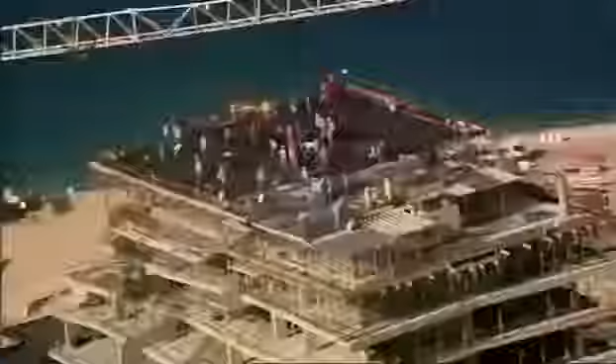Abu Dhabi, the richest city on the planet. It wants to join the City Super League and is undertaking an incredible transformation, building this extraordinary skyscraper, Aldar HQ. Nothing like it has ever been attempted. It'll be a race against the clock. Will this megastructure push even Abu Dhabi to the limit?

Abu Dhabi is in the midst of a construction boom. It's the largest of 7 sheikdoms known as the United Arab Emirates. Its capital, also called Abu Dhabi, is the richest city on earth. Its ruler, Sheikh Khalifa, has a cool $875 billion in the bank and an audacious spending strategy to match. He wants to transform the skyline and compete with the international elite of London, New York, and Hong Kong.

But this is not the first time the Emirate has stood at the crossroads. Just decades ago, Abu Dhabi was a desert backwater, until the discovery of oil in 1958 brought unimaginable riches to its ruler, Sheikh Zayed. As the petrodollars flowed in, he converted the shell houses into high-rise, and the traditional way of life was swept away.

Today, Abu Dhabi is a thriving metropolis, sitting atop the world's 5th largest oil reserve. But black gold alone cannot put this city in the Super League. To do that, Sheikh Khalifa must lure big business and tourist dollars. Abu Dhabi must expand to thrive.

To put Abu Dhabi on the world map, fledgling property developers Aldar plan a whole new micro-city, Al Raha Beach. It's an ambitious proposal. At 11 kilometers long and almost a kilometer wide, this city on the sea will be the biggest project ever attempted in Abu Dhabi's history. Mohammed Al Mubarak is in charge of delivering this audacious development. The vision of their highnesses and the vision of Aldar was to create this almost mini city where people can live, study, play, and work in one destination.

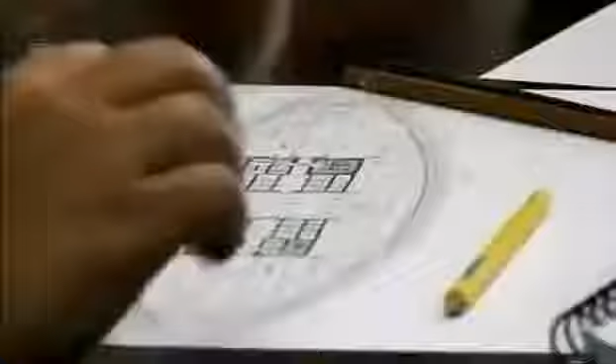Al Mubarak must attract investors if Al Raha Beach is to succeed. So to launch the project, he commissions a signature skyscraper. Creating an iconic structure on Al Raha Beach was of vast importance in basically putting Al Raha Beach on the world map. Al Mubarak sets Lebanese architect Marwan Zgheib the task of designing an icon that raises the stakes even higher. The building will become Aldar's headquarters in the heart of their colossal development.

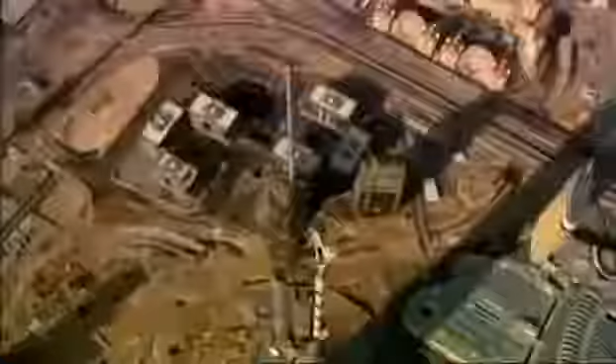But creating something new in a land where the iconic is the everyday won't be easy. Neighboring Emirate Dubai has taken center stage with a number of headline-hitting projects: the world's tallest skyscraper, Burj Khalifa, the Palm, and the World, and the emblematic Burj Al Arab. To stand out from the crowd, Zgheib knows he must redefine the extraordinary. Simple can be powerful sometimes, especially in architecture. You can see it since the pyramids of Egypt. Most of the iconic buildings are very simple buildings.

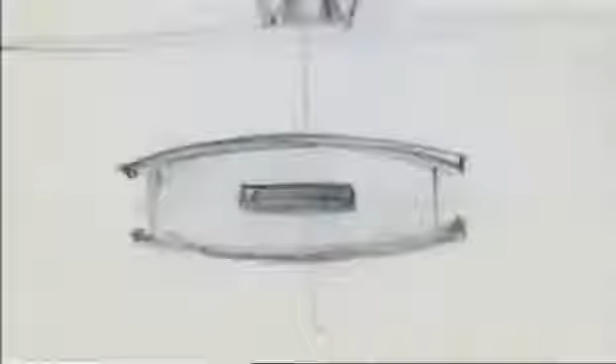But it isn't until Zgheib is relaxing on a plane that he has a brainwave. I couldn't sleep, so it was a moment of relaxation, you know. And then the idea came simply. So I took a pen and I drew it on a sketchbook. The design is simple but daring. A round skyscraper taller than the Statue of Liberty, with a curved glass skin covering the area of 4 football fields. To be honest with you, the moment I imagined it, I knew it was a winning concept. I knew it was something different.

In fact, the design is so unusual, Al Mubarak initially doesn't know how to react. When I first looked at the MZ design, I was a bit confused in the beginning, to be honest with you. I felt like I was looking at a comic. I felt that this was a flying saucer and basically it landed on Al Raha Beach. And I just kept on staring at it for like another 15 minutes. And after 15 minutes, I just fell in love with it.

Zgheib's design is inspired by nature. 2 giant circular curved walls of glass mirror an open clamshell. Architecture is nothing but imitation of nature. At the beginning, the idea was so geometrical, very pure. It's like a seashell. The seashell has deep meaning for Abu Dhabi with its seafaring heritage. But a circular design poses a problem. Just like a coin that stands on its edge, it risks being unstable. The circle must be balanced.

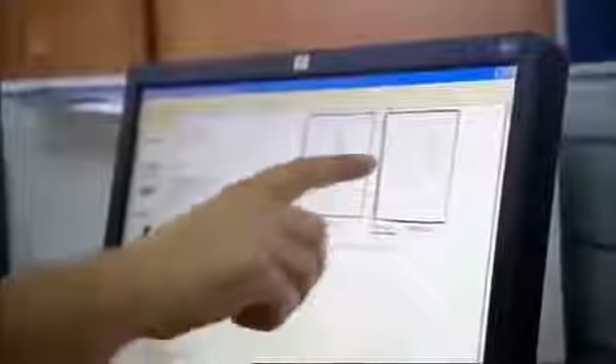So Zgheib turns to some very old-school geometry. The real challenge of the circular facade was to find the 2 points where the building should pose on the ground. And for that, I had to go back to one of the oldest rules in architecture, proportion. When you have a circle, you can divide it into a pentagram.

And that pentagram, in fact, is a representation of the cosmic body of the human being. So you can put a man in that pentagram, the man and the universe. So the pentagram will define the 2 points of the circle where the facade will lay on the ground. And this will create the perfect balance.

It was the same thinking that led 16th century philosopher Heinrich Agrippa to draw man as a pentagram inside a circle, and has helped architects to proportion buildings for centuries. But it's not the skyscraper itself that poses the first major challenge. It's the proposed site. They wanted to show me the site, but all you can see was the sea, nothing but the water.

Unbelievably, the solid ground required for Aldar HQ does not yet exist. The desired location is 700 meters out in the Persian Gulf and 8 meters underwater. New land must be created. Over 3 million cubic meters of sand must be found. Surely a simple task with Abu Dhabi's endless desert dunes.

Whilst cutting a shipping channel in the late 1970s, Sheikh Zayed created an island of discarded sand. Luckily for the engineers, it's just across the water, so they decide to move all 20 million cubic meters of it. A fleet of cutter dredgers eat their way into the island. These are no ordinary dredgers. It takes an enormous claw layered with 48 reinforced steel teeth to slice through the hardened sand.

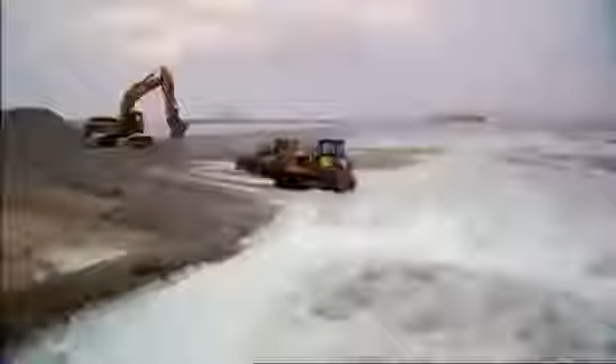The sand is pumped through a floating pipe to the construction site. Here, excavators toil 24 hours a day to flatten the virgin ground. After 8 months, the land for Aldar HQ is fully formed, and with this, the first major problem overcome. Now, engineers must somehow turn Marwan Zakhem's radical design into an engineering blueprint.

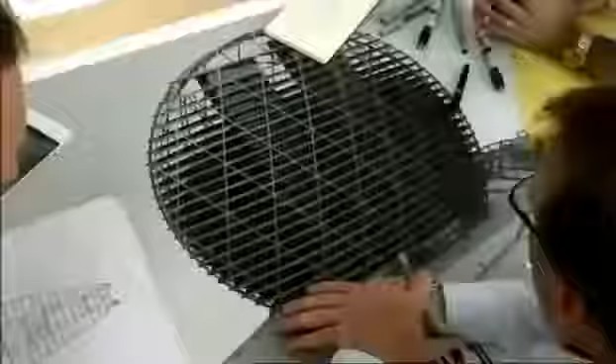Aldar want their skyscraper completed by an astonishing deadline. In just 30 months' time, the eyes of the world will be on Abu Dhabi when it hosts its first Formula One Grand Prix. The racetrack will be on its own designated island, complete with hotels and theme parks. And Aldar are building the lot. The international press and tens of thousands of visitors will descend on the city. It's the ideal opportunity for Aldar to showcase their new HQ. But to stand any chance of meeting this target, the team will have to pull out all the stops.

Just 1 month after design has started on Abu Dhabi's round skyscraper, the construction team arrive on site to begin foundation works. For construction manager Miles O'Sullivan, the schedule is a shock. With the design not complete and being told you're going to pile in 1 month, almost crazy. But it's not just the first deadline O'Sullivan has to worry about.

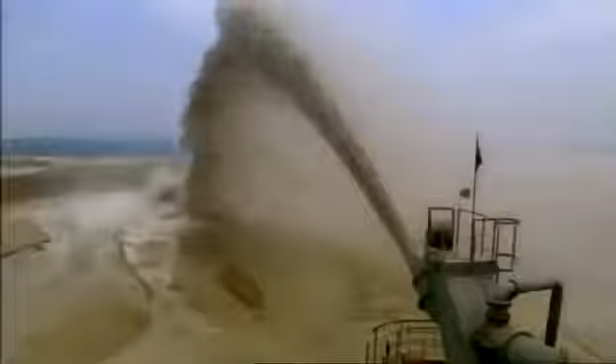Aldar HQ's round curved shape presents an enormous sail-like area when wind strikes. Wind tunnel tests must be done to prove the foundations can take the strain. But the results won't be back until work has already started. Abu Dhabi is regularly hit by high-pressure winds that sweep in from the Persian Gulf. But building Aldar HQ so close to the sea will put the foundations under another kind of pressure.

Digging for Aldar HQ is very similar to digging here in the sand. What you get as you dig down is you'll get to see the groundwater starting to surge through the sand. And in fact, it's that groundwater that we see start coming through the sand here that's creating the pressure and obviously creating the issues for us when we do the construction. The upward pressure of the water and the loose sand pose a problem for foundation construction.

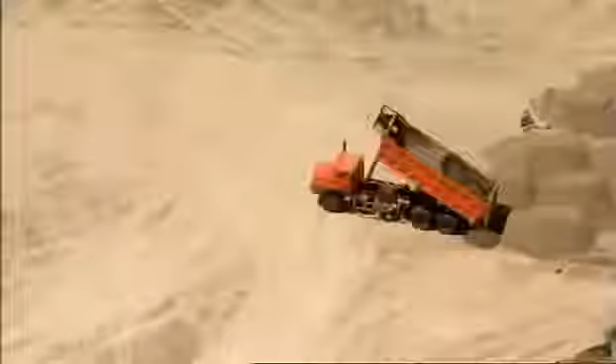Before excavation can begin, the team must build a solid barrier called a diaphragm wall or D-wall. It's a concrete barricade formed of interlocking panels which socket into the bedrock and reach 16 meters below the surface. The D-wall holds back the loose sand and the surging seawater, ensuring the ground inside the barrier can be removed. These areas here, what are these? Sumps? The D-wall must be built before the foundations can be laid.

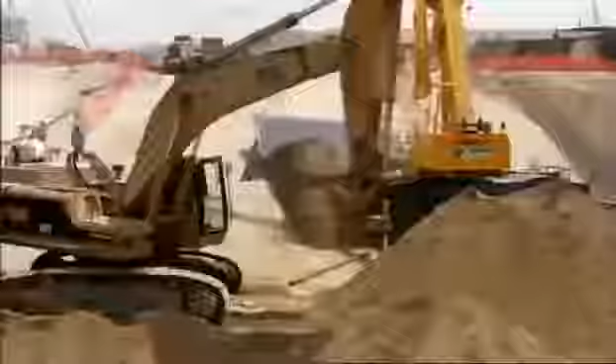But with the blueprint a work in progress, the team can only hope that over-engineering the foundations will make them strong enough. The design calls for about 400 concrete piles that work in 2 ways. Half of the piles rely on friction with the ground to secure the structure to the rock and sand below, whilst the remaining piles drive deeper into the rock to dissipate the building's immense loads into the ground. On site, D-wall construction begins. It's the same process ongoing at this Abu Dhabi construction site.

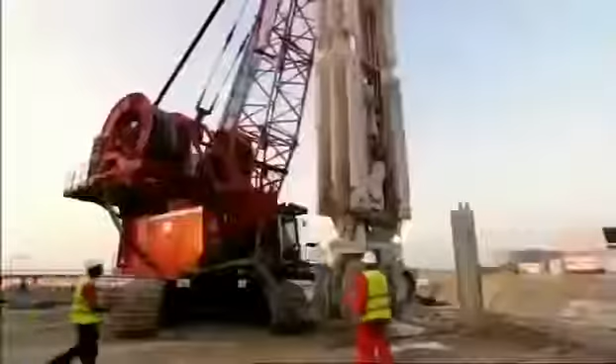Until recently, Al Raha Beach was just a vision for Aldar's Mohammed Al Mubarak, but the dream is slowly emerging from the sea. Seeing that land come up, seeing the amount of work and the amount of staff we had on the ground to make sure that was going to be done, that was like watching Rome being built.

The D-wall and concrete piles create a firm foundation upon which to build Aldar HQ. But the force of the sea pushing up through the sand still poses a threat to the skyscraper.

A great way of demonstrating the problems we faced at Aldar HQ with the groundwater is in imagining that this bottle here is Aldar HQ. And as I push the bottle down, you'll see forces are exerted on my hand. And in fact, that's the groundwater trying to push the building out, trying to push Aldar HQ out of the building site.

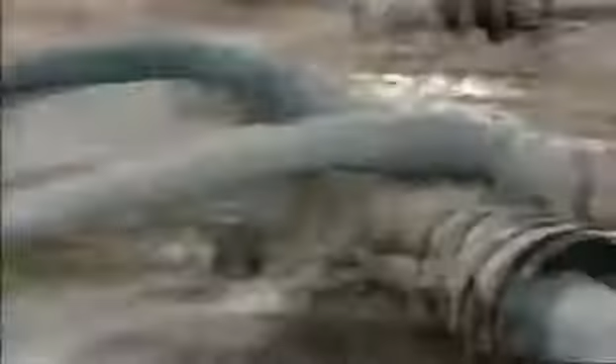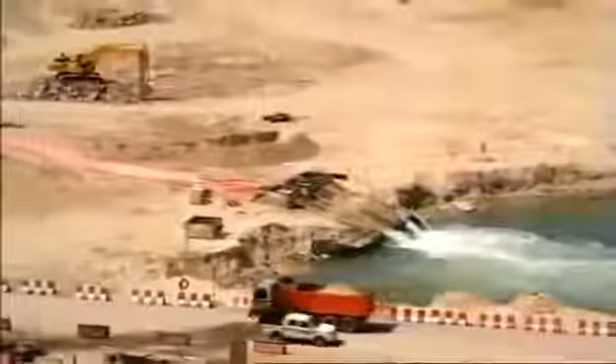To keep the site dry during construction, water is sucked out of the sand and pumped out to sea. But that's only a short-term solution. To protect this skyscraper in the long term, the team need an extra defense. It's a giant slab of concrete called a raft.

It creates a barrier against surging water, stops the piles from punching up through the building, and acts like a snowshoe to evenly distribute Aldar HQ's 59,000-ton weight into the ground. Raft construction for Aldar HQ is 12,000 cubic metres of concrete, which is a 30,000-ton structure. It's a huge element.

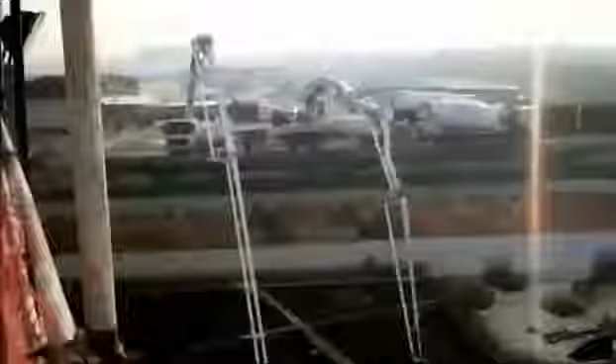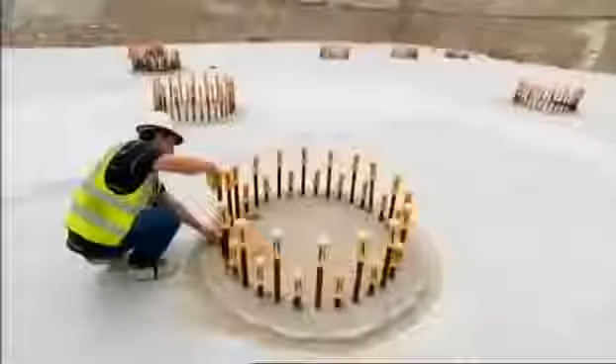With 2,000 truckloads of concrete to pour, it's a job that continues into the night. But engineers are just getting to grips with the severe forces that will affect the piles. The unique shape of the skyscraper will capture wind like the sail of a yacht. There are no guarantees the foundations will be strong enough to cope with the loads.

The advanced construction works had to commence so quickly that we didn't have time to do the wind tunnel test. It was important that we did one, primarily because this is a unique shaped building. Gibbons calls upon wind engineer Roy Denoon in Colorado, USA. He puts a scale model of the HQ through its paces in his high-tech wind tunnel.

Right at the start, Craig Gibbons actually called me and said, "We've got something really unusual coming up. Can you take a look at it and give us your first best guess of what the wind loads might be? Give us some guidance on how to get to some loads for the foundations, because this is running on such a fast-track schedule." Knowing that Gibbons is already building the foundations, Denoon wastes no time in firing up the fans.

If the tests reveal the wind loads are higher than predicted, the foundations already in the ground may have to be redesigned. To be putting in the foundations before we could finish the wind tunnel testing, that always gives us a little bit of cause for concern. Denoon is right to be worried. He knows how high-altitude wind impacts on very tall rectangular skyscrapers. But Aldar HQ's lower height means another type of wind is the threat.

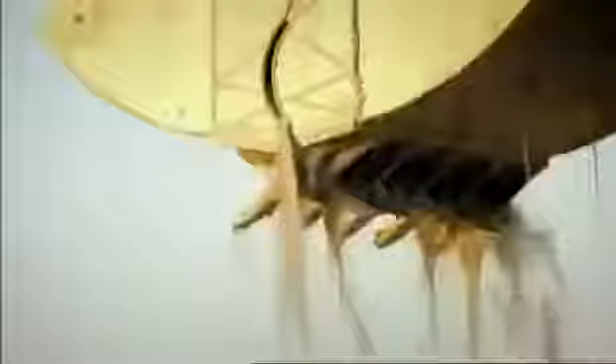It was a great relief to know that Roy was just winding me up, and that in actual fact the wind loads were very much in line with what our expectations were. The results of the wind tunnel test are great news, but the relief is short-lived. Now the structure needs a super strong backbone or core. But again, conventional building won't fly with this design. For Aldar HQ, one core wasn't enough. We needed 2 cores, in fact, to take all the loads down into the structure.

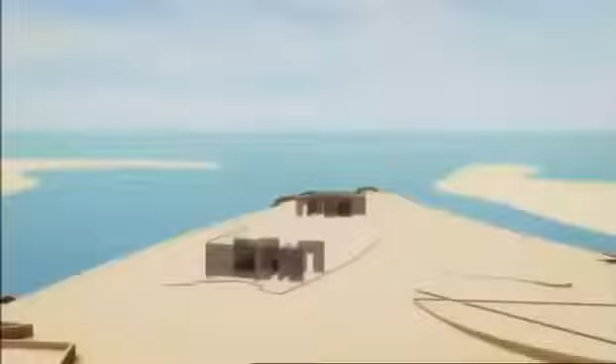Aldar HQ needs 2 concrete cores for extra stability. The twin spines rise a full 125 meters from the concrete slab to level 23. Reinforced with 6,500 tons of steel, these cores will transfer the loads into the piles. But to channel these forces safely, the concrete must be cast without any flaws. They need a way to build the cores as 2 single pieces of concrete. The answer? To slip form.

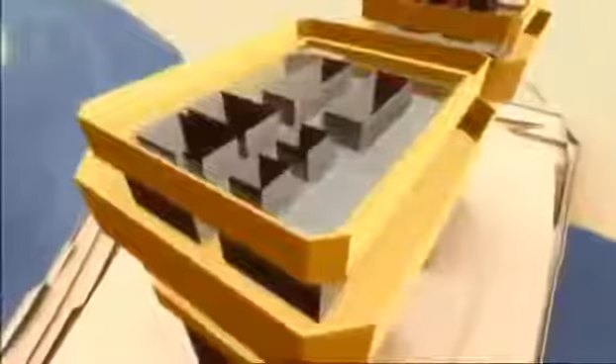It's a clever way to build big concrete towers. Liquid concrete is poured into a giant mold, which forms the shape of the structure. The mold slowly climbs up the core as it's cast, forming a single concrete tower without any joins. Seamless concrete will ensure the HQ's cores are strong. But these 125-meter backbones must be built in only 6 months. It's the same process ongoing at this Abu Dhabi construction site, led by the Aldar HQ team.

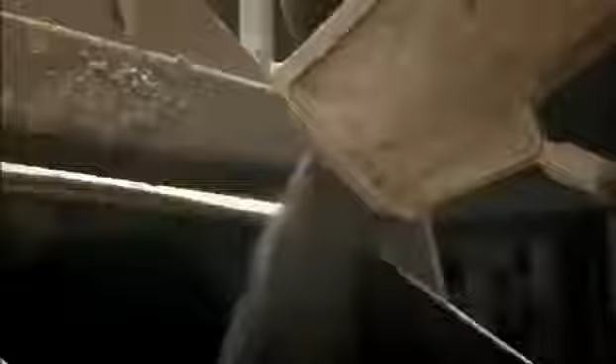We are calculating how much per hour we need to climb, and then how much concrete we need to place in every hour. Slip form is fast, but on this schedule it's not fast enough. O'Sullivan has a trick up his sleeve to speed up construction. We set a challenge to both cores, who could get up there first. More, get up. The teams battle to reach each level before the other.

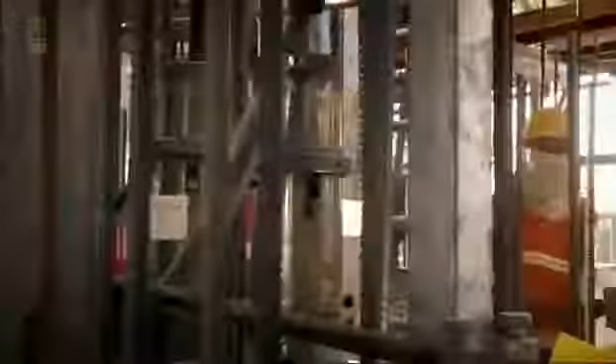The cores grow meter by meter under a constant cycle. The concrete is released and poured around the steel reinforcement. Hydraulics anchored to the structure raise the mold or shutter so that the next layer of concrete can be poured. Manpower is a key focus because slip forms are very labour intensive. You need to make sure that the guys are on deck, they're there at the right time, they're doing the right works.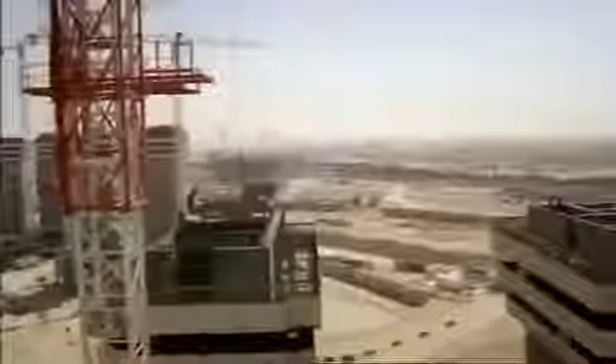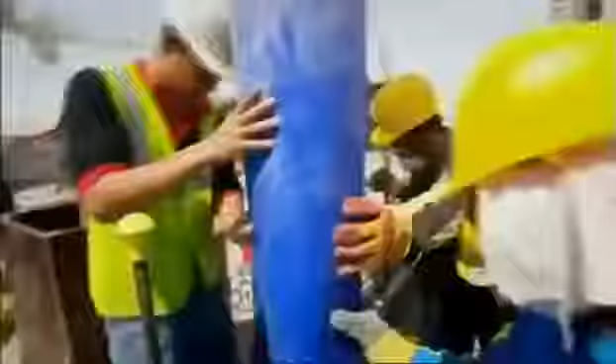4 months into core construction, the 2 teams are neck and neck in the race to the top. Core 1's team leader keeps a close eye on Core 2's height. It's been my benchmark, so if I'm doing better, I'll be ahead of them. There are a lot of pressures. My boss is telling me, do this, go up, go up, go up. But it's good, the pressure is good. Core 2's leader also feels the strain. I'm working 24 hours today. I try to finish earlier than the other core.

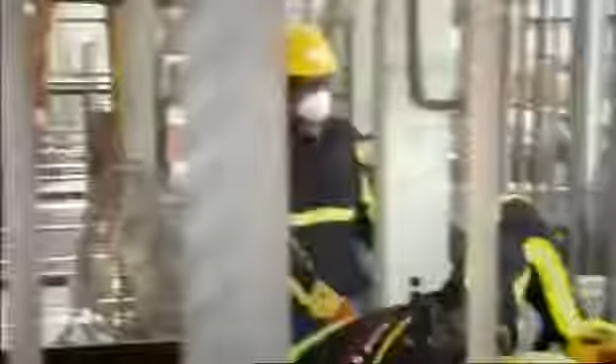Every month, the builders pour enough concrete to fill 1.5 Olympic swimming pools. But the teams aren't home and dry yet. There's still a challenge to finishing. Cores are renowned for going up quickly and sometimes having problems, so there's a lot of coordination effort that goes in to make sure that they do go up on time. We had structural steel elements to cast in. We had crane connections to get right.

After just 6 months, the 2 cores are approaching the top. Core 2 is only a meter or so behind, but Core 1 push ahead to victory. Core 1 won the race. It's really good to know that we're on top. For O'Sullivan, the contest to build the cores in record time has paid off. A lot of planning goes into the cores. To see it come off, a fantastic feeling. But it's only a stepping stone, the core construction. There's a lot more to go on.

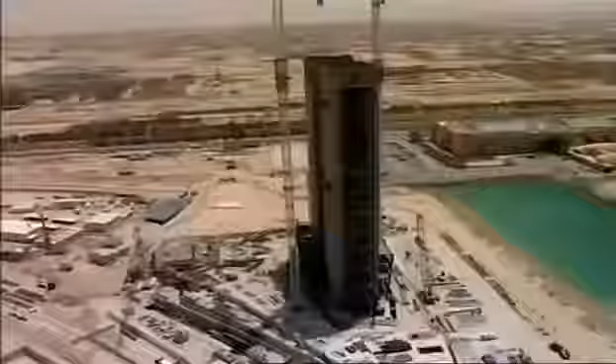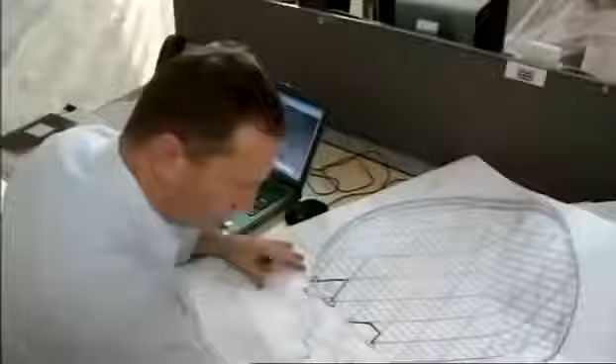The team have so far overcome the obstacles to bring Aldar HQ to life. But now they must face their most complex challenge to date. 1 year in, and Abu Dhabi's radical skyscraper is beginning to take shape. But with only 19 months to the deadline, the engineers must crack how to build Aldar HQ's vast external shell.

The design demands a heavyweight shell to support its wide girth and survive huge wind loads. But the architect stipulates open office space, floor-to-ceiling windows, and panoramic views of the Persian Gulf. In the United Arab Emirates, the shells of rectangular skyscrapers are built with concrete.

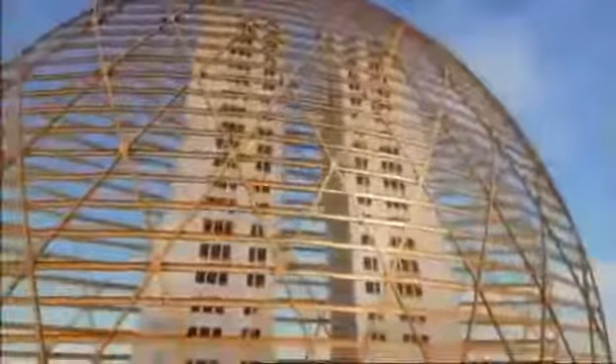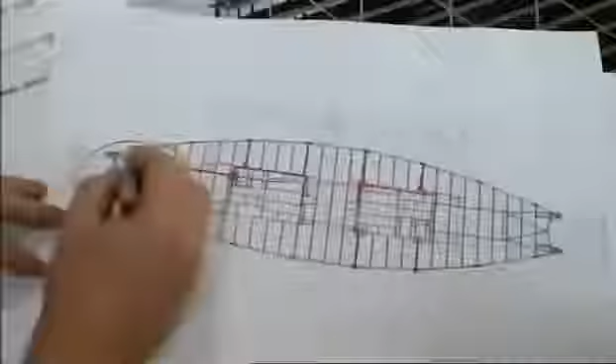The steel exoskeleton should make the architect's vision possible, but it'll be a first for the United Arab Emirates. Constructing a skyscraper like this will be a step into the unknown. The geometry of the building presented a significant challenge to us, but the other challenge was that a diagrid building, or buildings using this diagrid system, had never been built before in Abu Dhabi and the UAE. Let's have a look at it if you don't mind.

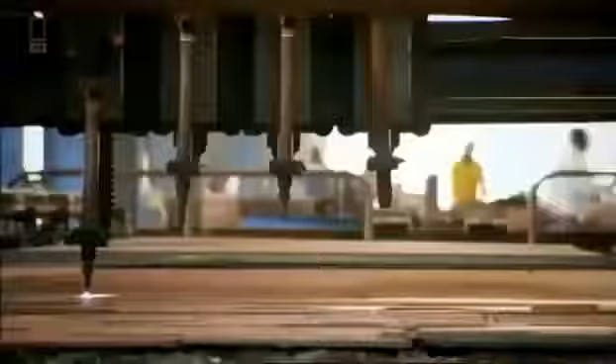It'll take expert steel fabricators to pull this job off. When we first saw the design, it was something that we knew we had to put our most experienced guys on. The structure's very, very complex. The army of fabricators work in shifts around the clock to cut and weld 2,500 tons of steel. The factory is building a series of A-shaped steel sections, weighing up to 30 tons each. They will connect together to form the structure's signature curves.

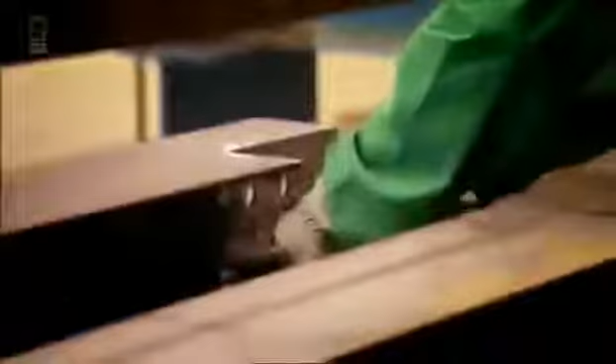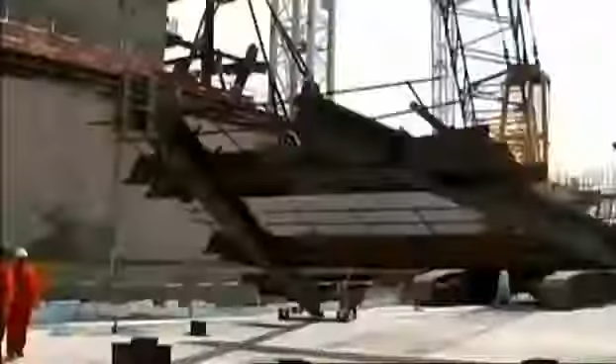But if manufacturing these giant A-frames is not a big enough job, lifting them into position on site will be a major challenge. Great to see the steel arrive for the main diagrids, the main columns to the structure. Huge sections. The thought of actually starting the steelwork some 18 months after we started the job, fantastic. But excitement of the first A-frame delivery is soon replaced with trepidation. Lifting these monsters will be a precision job, and tensions run high.

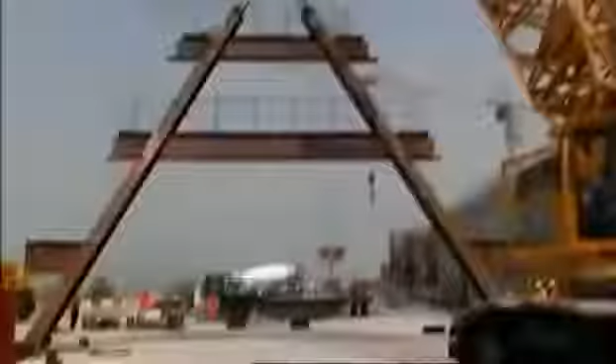When we rigged the first A-frame up, you've got to put all the chains on it. It would take maybe an hour to rig it up, and everybody's then thinking, I hope this is going to work. Everyone is on tenterhooks. Now is the moment of truth. The A-frame is lifted off the ground. There was a big ah from the crowd when it went in. The first exoskeleton section is finally bolted to the base plate. To see one go in, an amazing feeling. First A-frame up, again a milestone achieved, but then a lot more to go.

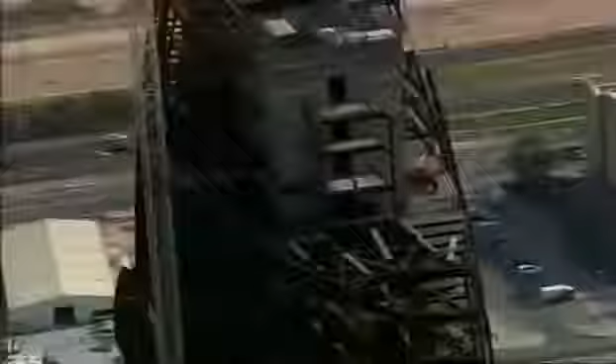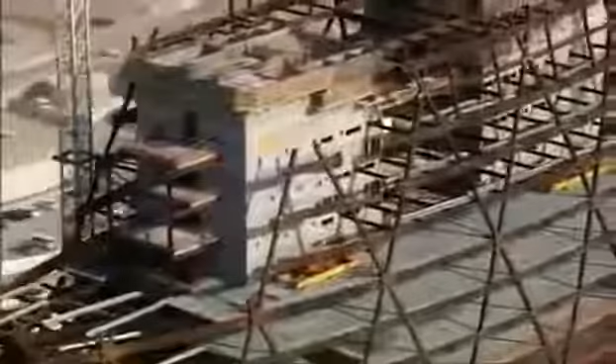Another 99 A-frames must be fitted to form Abu Dhabi's unique skyscraper. The handover date is now just 19 months away. So the team must now focus on the HQ's interior. The structure needs an alarming number of restrooms, 85 in total. This is no weekend DIY job. It'd take an army of plumbers and time the schedule cannot spare. So to fast-track the task, the team innovate again with prefabricated washroom modules, or pods.

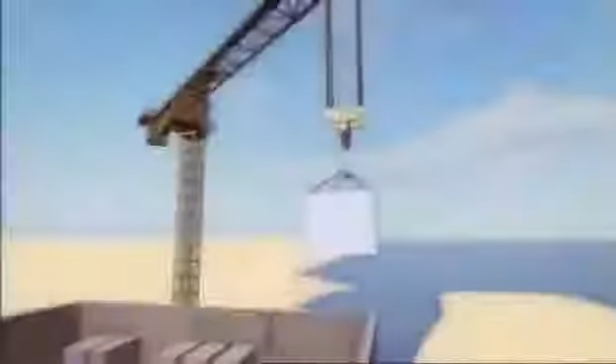A pod is a factory-made restroom, complete with lavatories, basins and mirrors, ready to plug into the building. The team plan to lift these 12-ton pods by crane and lower them into the cores like a giant game of Tetris. Construction is a finely tuned sequence. The pods have to be in before the exoskeleton blocks access to the cores. Aldar must approve the design fast, but there's a problem.

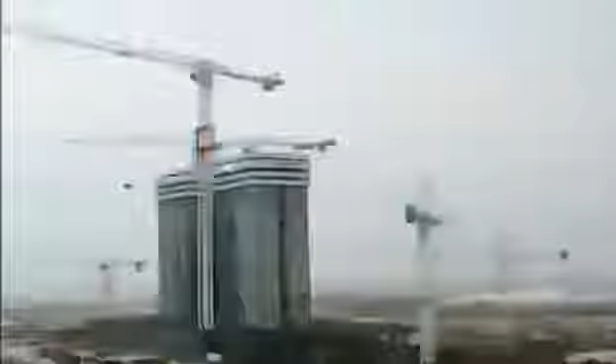We produced a lot of visuals and graphics which we had signed off. Then we actually built the pod. We went to look at it at the factory and a lot of people thought that's it. But Aldar unexpectedly rejects the pod design. It's just too ordinary for such a futuristic skyscraper. It will take months to remodel, and the exoskeleton can't wait. The whole plan could go down the pan. The only option is to leave out 2 roof sections and drop in the pods later, but this has its own dangers.

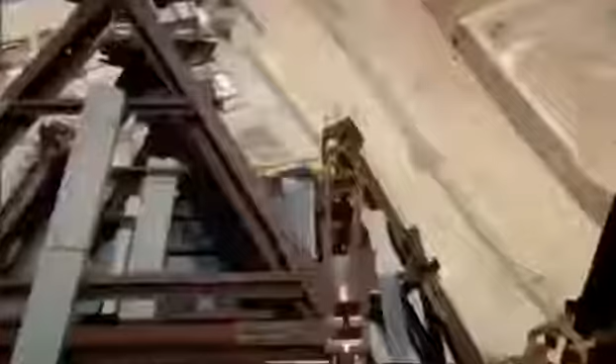With zero hour looming, the team must now wrap the building's skeleton with a glass skin. And no one has ever built a glass facade like it.

The geometry of Aldar HQ is highly complex. 2 giant bowed facades cover an area the size of 52 basketball courts. A third narrow surface joins the round facades like a zipper, arcing an extreme 290 degrees from one side to the other. But curved glass like this doesn't exist. The engineers need another plan.

The secret to covering a curved surface with flat glass is its shape. Square glass isn't an option. Squares can only bend in one direction at a time without distorting. Aldar HQ needs triangles. They can pivot on 3 axes and seamlessly join with their neighbors. To form these complex curves, it'll take 25,000 individual panes.

But before glass production can begin, the team must know what wind pressures it will face. It's back to wind engineer Roy Denoon, who must test the design in his wind tunnel. When we first saw the design, we knew there was some potential for some quite high glass design pressures. If you under-design a pane of glass, then it will be sucked out the building. The large facades are most likely to cause trouble.

The biggest loads on the overall building are the winds coming flat into the wide face, so it's capturing it almost like a sail. The wind comes into the centre and spreads out around the building, and where it separates and splits away from the building around the edges, that's where we see the largest pressures. The pressure is like a big SUV hanging off the outside of each panel.

But that's not all Denoon's test reveals. The circular shape of Aldar HQ creates another problem. When we initially saw the design, the sharp edges threw up the warning flag that said, look, we can get some pretty large pressures here. Where the wind hits the edge of the narrow strip of glass, it spirals in on itself, creating a vortex.

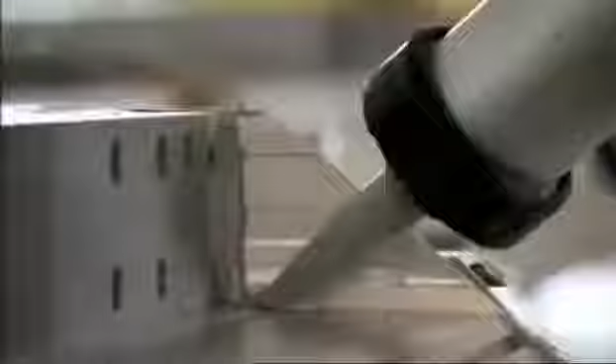But that does nothing to limit the scale of the job ahead: installation. You talk about 25,000 pieces of glass. To do that for the building in 10 months, it's a monumental effort. It's a constant battle, making sure that you get the glass to site. But having the glass factory on site is a lifesaver. It made it easier for the site to actually call up on glass. Once they are installing the panel, they ran out of glass, we're immediately on the phone. We need more panels over there, so we got them on a truck, and 5–10 minutes later they were on the site.

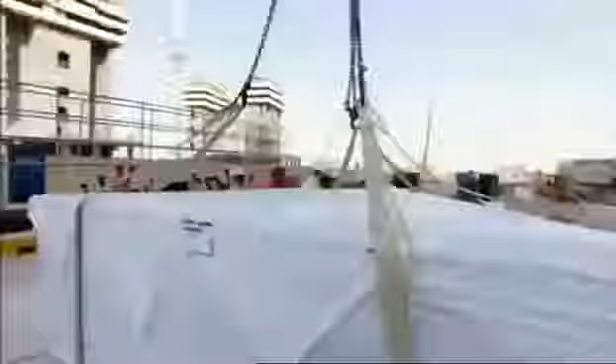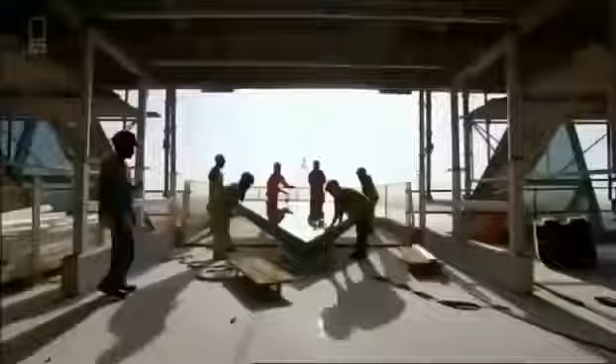The glass factory sends the panels to the site by truck, and the panels are lifted by crane up to the installation team. The constant pressure was the program. The glass is pulled onto the floor plate, but it takes a team of 8 specialist riggers to install the panels. Probably the hardest thing was the sheer volume that had to be installed. Fixing glass on a curve at this height means the panels have to be swung out from a platform that hangs out of the building.

It should be easy, but then this team have Abu Dhabi's wind to contend with. The wind here can just blow in from nowhere. It caused us no end of problems. The glass would start to revolve and spin. We would get a choice whether to lift it, bring it into the building, put it down, or to put it straight back down on the ground. They were decisions that had to be made on the spot. And you don't want a large panel coming down from 20 stories. Just contemplating that, it doesn't bear thinking about.

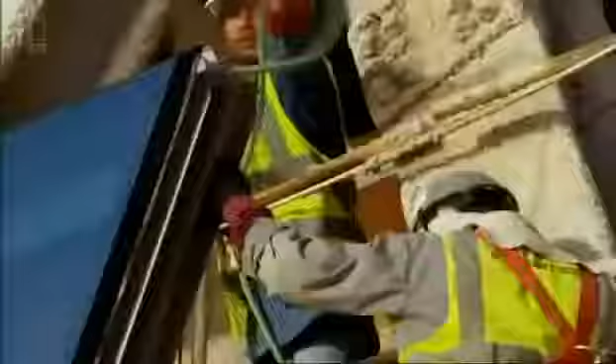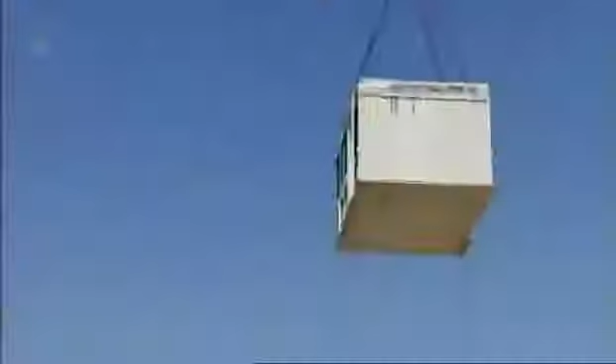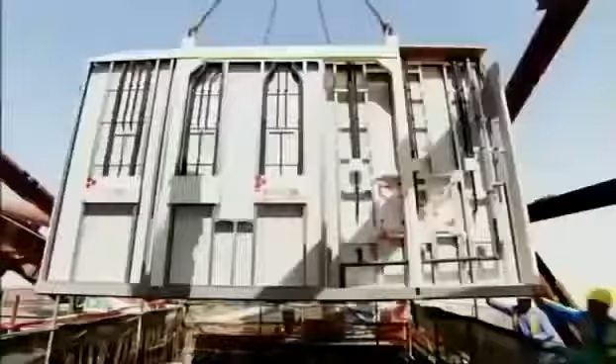The new design is finally approved, and after 10 months, the 12-ton modules start to turn up on site. The pod drops are quite quick. We hook them up, we take them up the 140 metres to the top of the tower crane. The pod can now be lowered into the core shaft. It's a tight fit with just 75 millimeters of clearance. When I saw the first pods in, it was a relief that that saga was over and we'd actually managed to achieve what the client wants.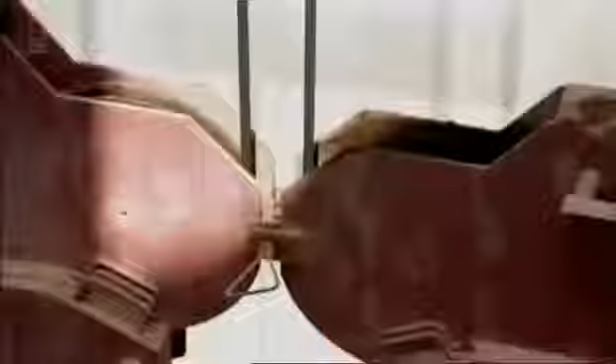The pods are on the move, but the long delay has serious consequences. Finishing the exoskeleton should be a straightforward task, but the incomplete steel roof has sagged out of shape.

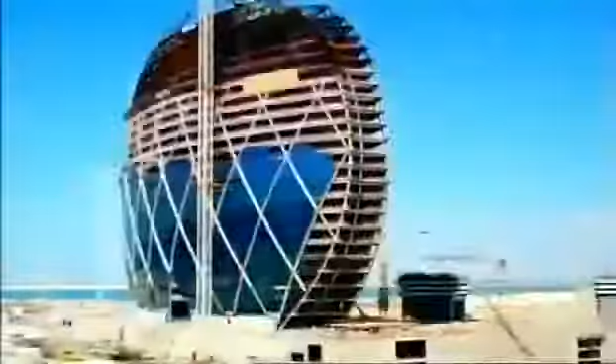Eight months from the deadline, and the world's first spherical skyscraper is fast approaching completion. But with the end in sight, construction hits a serious snag. The delay in fitting the washrooms into the cores has forced the team to leave the roof arch open, causing the steel to slouch out of shape.

The arch of the HQ's lightweight roof is the key to its strength. Its curves evenly distribute the forces down into the foundations. But if any elements of the arch are missing, the forces cannot flow away. The roof will sag under the weight. To discover how serious the slump is, the steel is surveyed.

I made a phone call to our site supervisor, Bob, and asked the question of what the actual sag was recorded, expecting it to be around about 50, 60 mil. When we got the figures of 150 millimetres, I was a little bit shocked. With a building that relies on precision engineering, a 150 millimetre sag is a huge problem. The roof will not slot together. The brackets to connect the remaining 40 glass panels will be out of alignment.

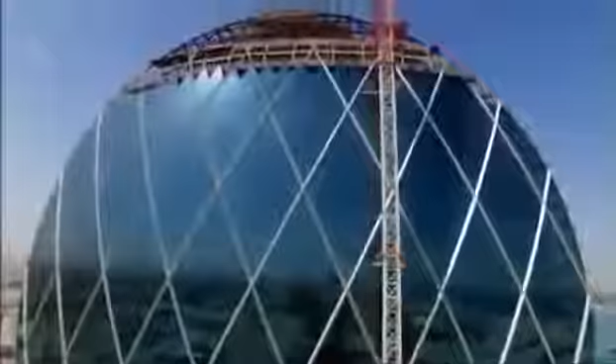There is no time to redesign. The team have to somehow make the roof steel fit together. The only way is to lift the entire roof into position, and it weighs a staggering 200 tons. Even for experienced steel engineer Bob McPhee, this is a serious undertaking. I hate it when you start waking up thinking about your work. I've never liked to do that.

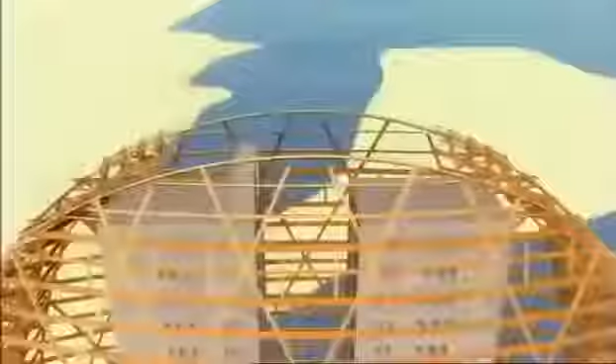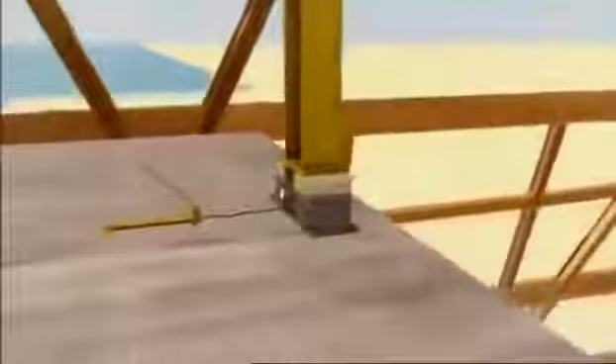To lift the roof arch, 2 hydraulic jacks are positioned on top of a load-bearing wall, carrying 80 tons of weight into the core. 2 more jacks are propped with 16-meter-tall steel columns and channel 40 tons each into the concrete floor of level 23. The props are packed with steel slabs to hold the roof in position as the jacks are raised.

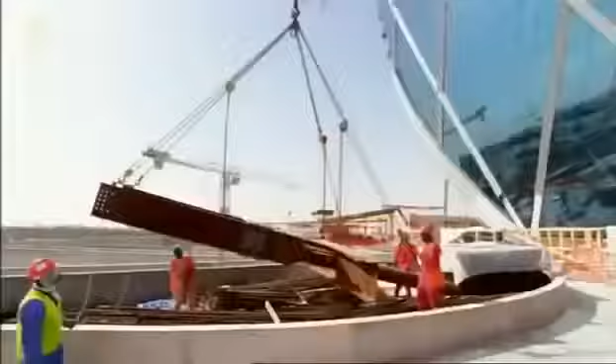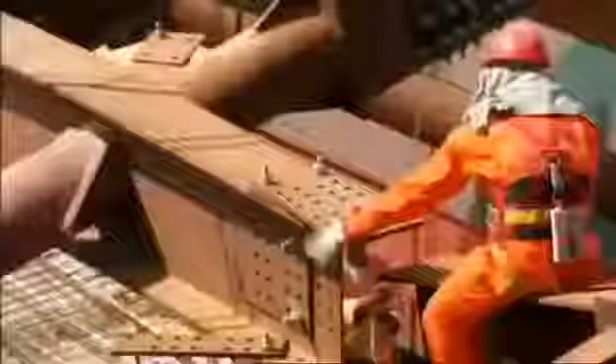The roof was moving firstly a couple of millimetres, then 5, then 10, then gradually into its position, 20, 50, 100, and then into its final position, 150 millimetres. The entire roof is raised by a whopping 150 millimetres. The slumped arch is finally in the right position. All that remains is to lift the last steel section. It's a tight fit. With a millimetre to spare, the roof is finally complete.

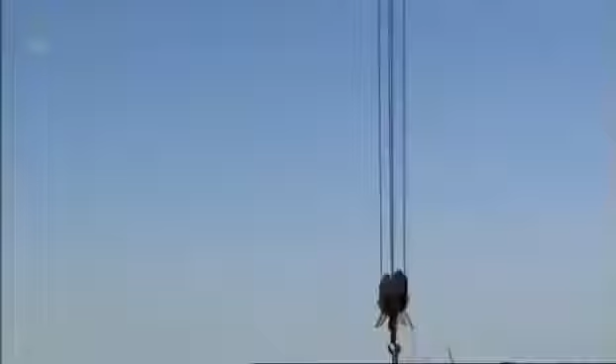With just weeks to spare before Abu Dhabi's first Formula One motor racing spectacle hits town, all of Aldar HQ's 25,000 glass triangles are in position, except one. The glass installation team lower the pane inch by inch. No one wants to be responsible for shattering the last sheet of glass. It's a defining moment for the team.

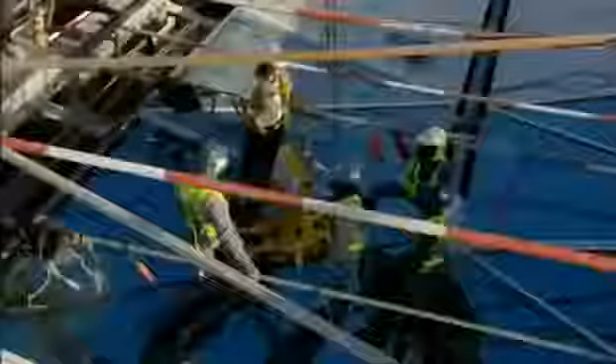Finally, the last pane slots into place. Ecstatic. Actually see the last bit of glass go in. Amazing feeling. Hopefully the guys here feel the same way, and I'm just overjoyed. Against all the odds, and in just 30 months, the team have fulfilled their brief. An engineering triumph. This is Aldar HQ.

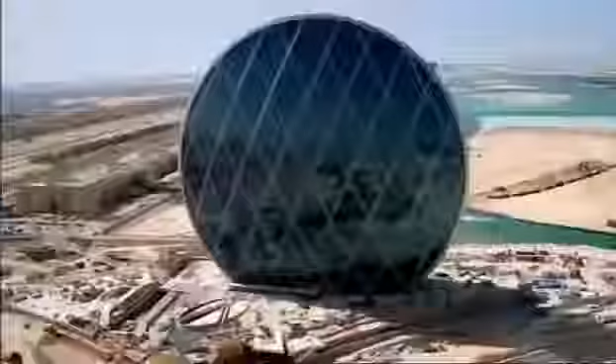Mohammed Al-Mubarak fell in love with an extraordinary idea. But will the building match his high expectations? It is really a work of art. It's a stunning building. To me, it feels like it should be in a museum. The space is unbelievable. It's a really colossal building. When you come up front to it, it's even bigger than you even imagined. And for it to come from paper to that, it's great.

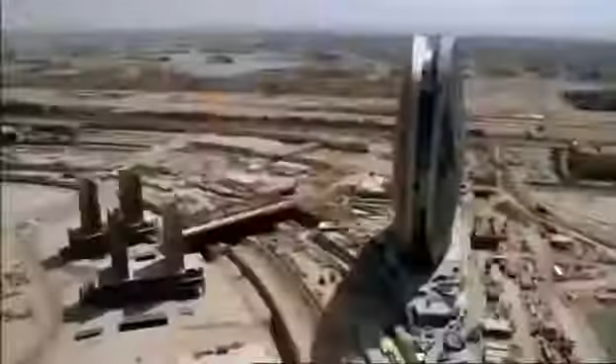Already an icon on the Abu Dhabi skyline, Aldar HQ should lay solid foundations for the future of Al Raha Beach. Architect Marwan Zgheib is delighted to see his concept sketch come to life. The building is more beautiful than the original idea because it's real now. It's no longer a simple concept. It's become reality.

Aldar HQ is a structure that rivals not just Dubai's iconic buildings, but can stand proud on the international stage. The HQ building has really put Abu Dhabi on the world map. If you ask me today, we're not yet into the world of Singapore or New York or Paris or London. Will we get there? I absolutely believe so.